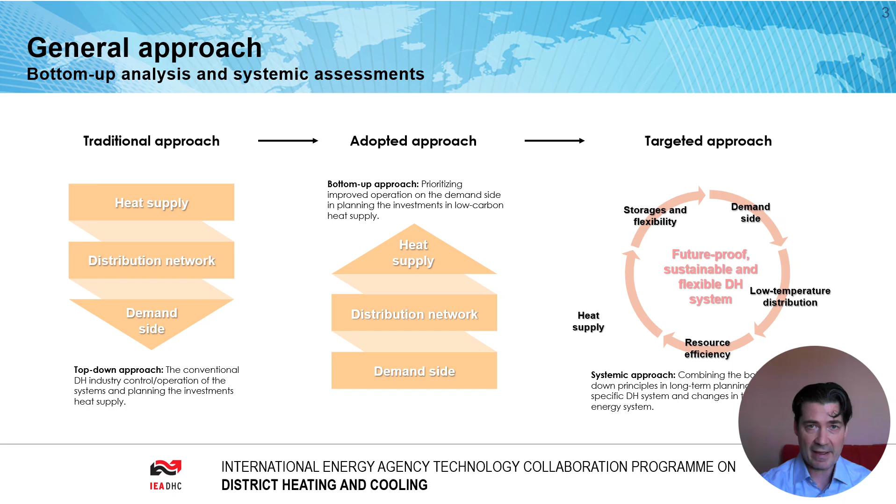So what is flexibility? It is an ability to control the heat supply to accommodate the heat demand. This is useful for managing the demand profile, but also to accommodate, for example, wind and solar power from the electricity system, or to react to seasonal availability of resources. Heating sector can potentially provide significant amount of flexibility in a cost-efficient manner.

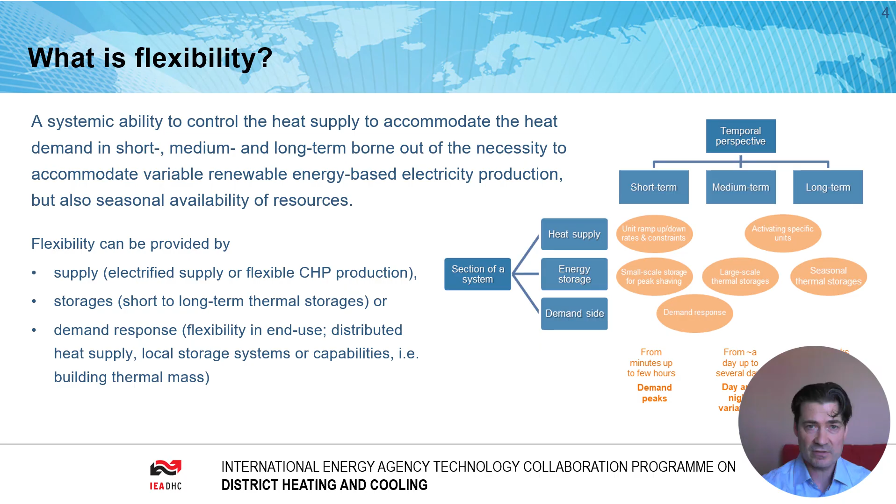Usually, operational flexibility is in focus, but the motivation for increasing the flexibility is more strategic in nature. For example, anticipating changes within the surrounding energy system, preparing for the emergence of excess heat, or considering the availability of renewable heat sources. In the figure there on the right hand side, there is an attempt to categorize the flexibility measures based on where in the system they are provided or from the temporal perspective.

And now moving on to the first WP1, potential of district heating flexibility options in a long-term perspective. The objective of this study was to evaluate policies or measures that affect the flexible use of district heating by using energy system modeling as a method.

This was actually a case study for the island of Gotland, with the focus on the district heating network in the Visby region. Visby has a district heating system with biomass boilers, heat pumps and thermal storages already.

The method was TIMES modeling framework, and the 2 scenarios that were considered were wind power based ones: one with no offshore wind and the second one with large scale offshore wind enabled.

In addition, 4 district heating based sensitivity cases were considered: a base case with no additional measures, one with a capacity tariff, one with a bonus system for low temperature district heating, and then finally the 4th one with both capacity tariff and low temperature bonus enabled.

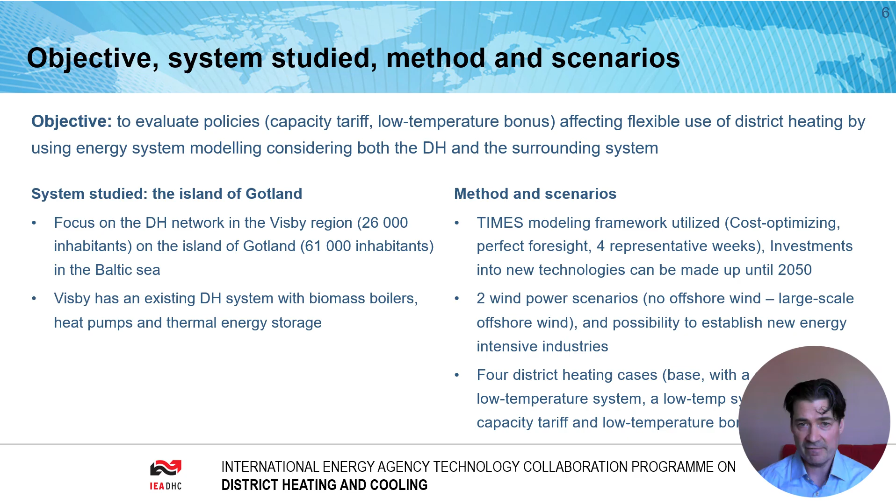So on to the results. Here, district heating production is presented with and without the offshore wind being part of the system. With offshore wind, the district heating is clearly shrinking unless low temperature district heating is introduced. Without offshore wind, the outlook is much more positive. However, when introducing a capacity tariff, this is clearly not beneficial for the development of the district heating system.

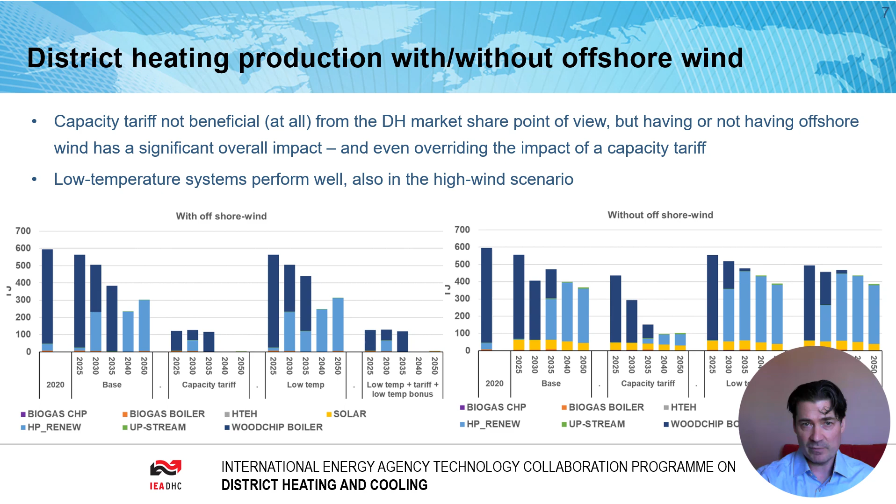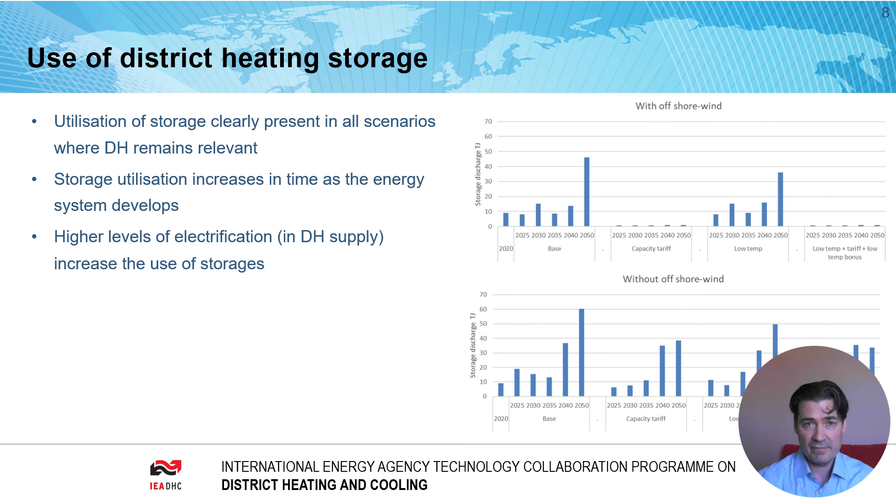Another interesting example of the results is the use of district heating energy storage. The utilization of the storage clearly is present in all the scenarios and cases where district heating remains a relevant option. Also, as the energy system develops and we go forward in time, the storage utilization increases. Additionally, higher levels of electrification by heat pumps and electric boilers, part of the district heating supply, increase the use of storages. So here are some main conclusions about the work.

Surrounding energy system has a profound impact on how the system develops. Capacity tariff as a measure or policy instrument clearly decreases the economic viability of district heating. Introduction of low temperature district heating helps to maintain the market share quite a bit better than the alternatives. And use of storages clearly increases in future district heating systems, especially if electrified heat supply is present.

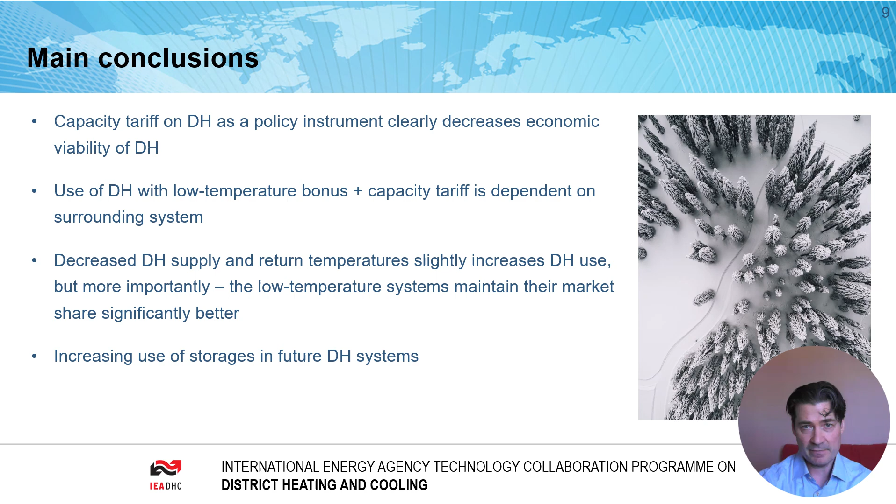So moving on to WP2 and operational flexibility of district heating within the Nordic energy system of 2030s. The overall plan and objective was to consider and assess the impact of flexibility measures, namely demand response and thermal energy storages, in district heating systems on two levels: first, Nordic energy system level, and second, for a specific case district heating system. As part of the work, the impact of different weather years was considered.

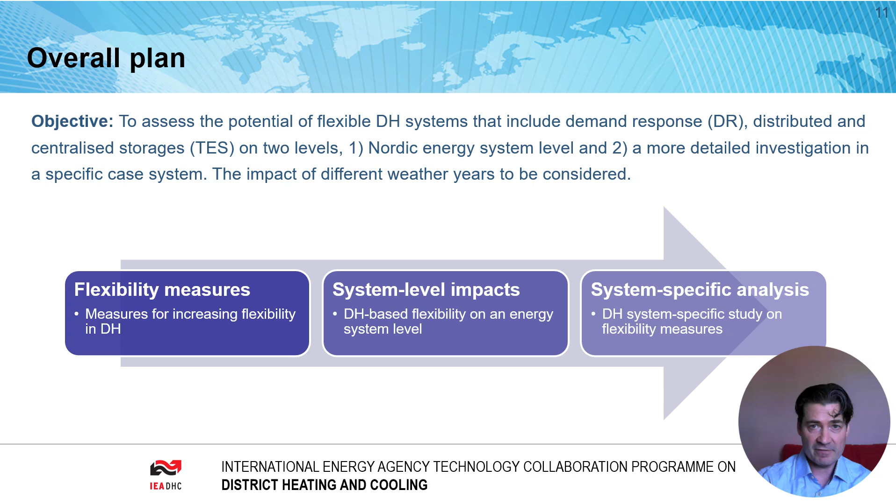3 scenarios are compared: first, a reference scenario; second, a thermal energy storage case with additional thermal energy storage capacity; and thirdly, a demand response case with added demand response capacity.

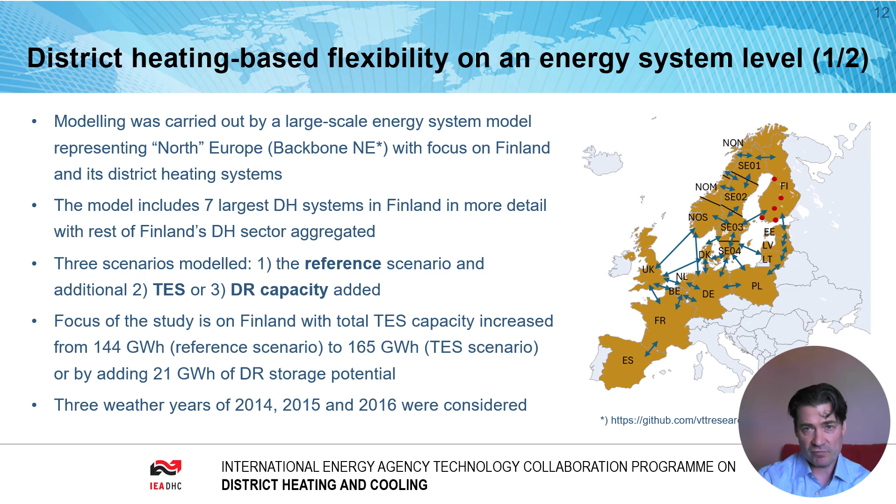To assess the robustness of the results, the model was run for different weather years: 14, 15, and 16. Here are some examples of the results. First, the impact of additional flexibility was positive, although minor. This is due to the comparably small additional capacities defined.

There was also a decrease in biomass consumption in heat-only boilers and a corresponding increase in CHP production, and also an expected increase in electrified heat supply, especially the electric boilers.

Thermal energy storages were used extensively and with high capacity, while demand response was operated with more frequent but smaller adjustments. In the study, we also noted a methodological issue concerning where flexibility is observed, as the system was optimized as a single entity. So would specific parts of the system actually provide the flexibility as modeled? In other words, while the outcome is optimal, can the market mechanisms be assumed to steer the operation of specific systems as indicated by the model?

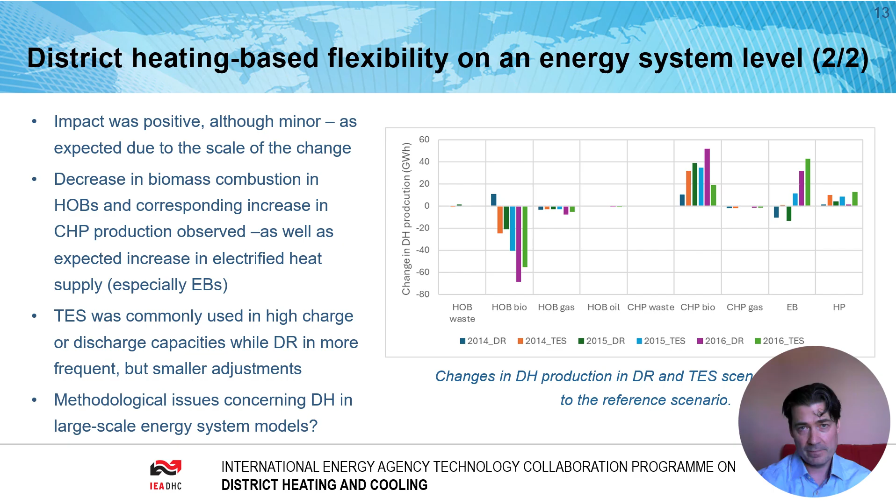Due to the methodological issue, there is clearly a need for a system-specific study. This was carried out using the same energy system modeling method, but for a specific case study system. This case study was done for the district heating system of the city of Kuopio with approximately 1 terawatt-hour of heat demand and a very versatile production mix.

Four scenarios were considered: first, no thermal energy storage or demand response capacity included; second, with thermal energy storage capacity increased; third, with demand response capacity added; and fourth, with both thermal energy storages and demand response.

Electricity and weather years of 2022, 2023, and 2024 were considered. These include the crisis year of 22 and a year with very low electricity prices, 24.

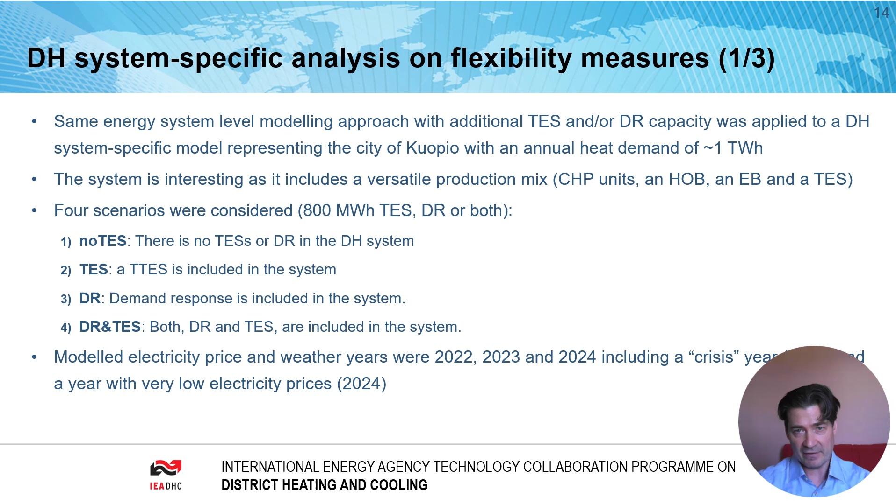Here are some more results. Changes in heat production within the CHP and electric boilers in different scenarios, with thermal energy storage, demand response, or both included, are presented on the right-hand side. Having additional thermal energy storage has the most visible impact, but there are significant differences between years. On the left, utilization of thermal energy storages and demand response in different scenarios is presented, with thermal energy storages again showing the more visible impact.

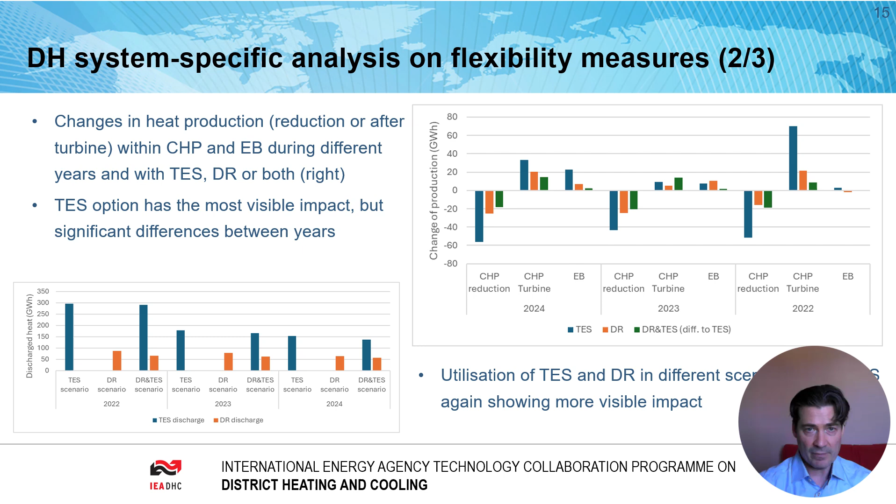Here, annual operational costs to the right and monthly cost savings below in different scenarios are presented. Thermal energy storages provide higher benefits than demand response, but both are beneficial in terms of costs. Absolute values in savings naturally depend highly on electricity price levels, which is a significant factor for the results here. This can be observed by comparing the results corresponding to years and then to the scenarios.

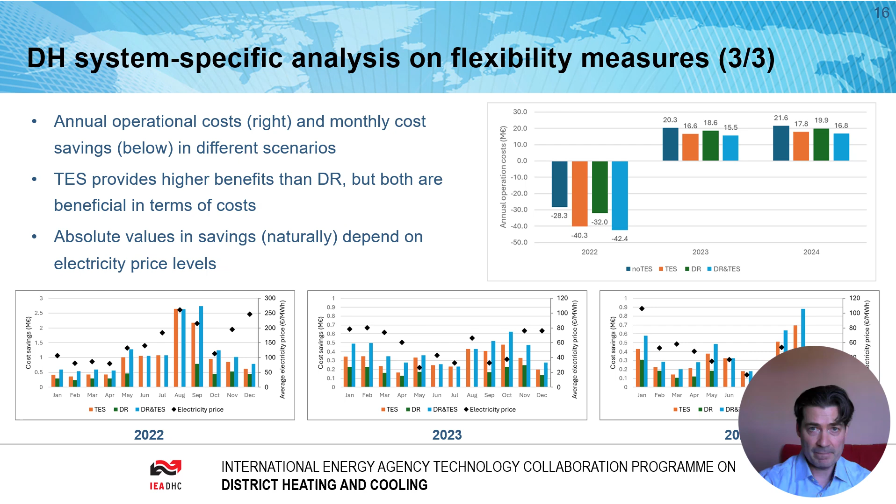Here are some main conclusions that can be drawn from the presented work. Flexibility is becoming an integral feature of district heating systems due to heat supply electrification and also due to the increase of wind and solar-based electricity production in the systems. Linked to this need for flexibility, electrification is clearly a trend in district heating development.

While flexibility provides benefits from both energy system and district heating point of view, the yearly variations can easily outweigh the impacts of having more additional thermal energy storage or demand response capacity, for example, in the systems.

The large-scale energy system modeling shows that there is a benefit to be gained through flexibility, but it also shows some signs of unrealistic behavior. Will specific systems actually provide the flexibility as modeled? Also, one additional point is that reserve market participation, which was not considered in this study, is likely to represent opportunities for systems that have increased flexibility.

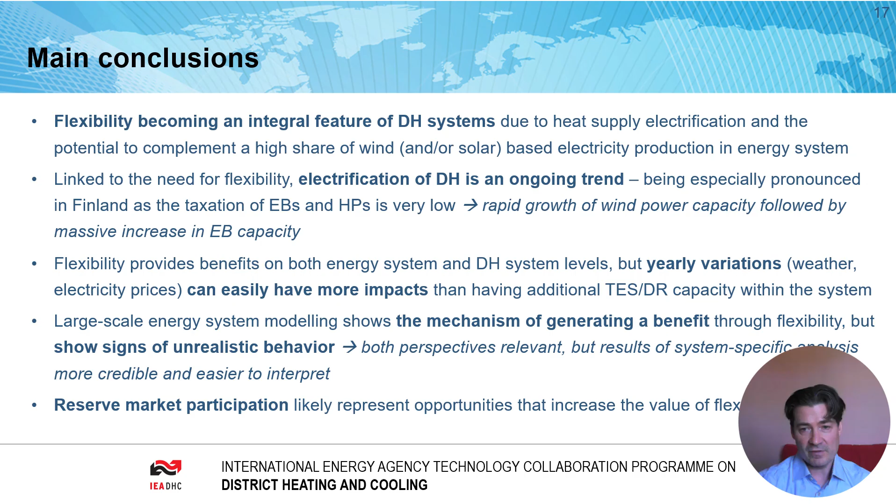Next, moving on to WP3 and future-proof design and operation of demand-side components. A realistic case example of the city of Viborg and its district heating system is used for this study. The Viborg district heating system was originally based on natural gas, but aims to be fossil-free by 2027. This target's economic feasibility is compromised by the bottleneck of having high supply temperatures in buildings.

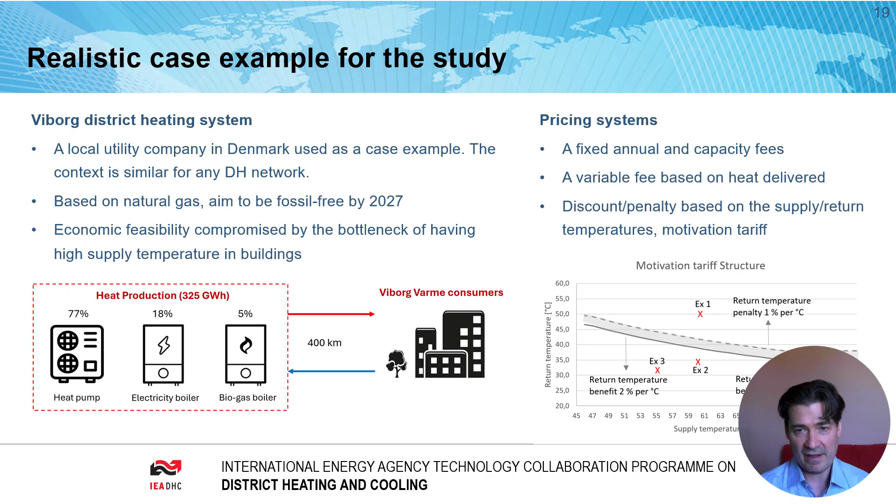This is mainly due to the future heat supply being mostly dependent on heat pumps. Viborg also has an advanced pricing system, for example a discount and penalty for the heat tariff based on the supply and return temperatures, so-called motivational tariff.

The first part of the work presented focuses on space heating systems in existing multi-apartment buildings with radiators as the heating elements. The plan and method was to utilize heat cost allocator and heat demand data to analyze the operation of a heat distribution system and to suggest improvements.

The outcome was that significantly lower temperature levels were possible without any compromise in the heating service itself. As part of the work, a methodology for securing low temperature operation of buildings was developed.

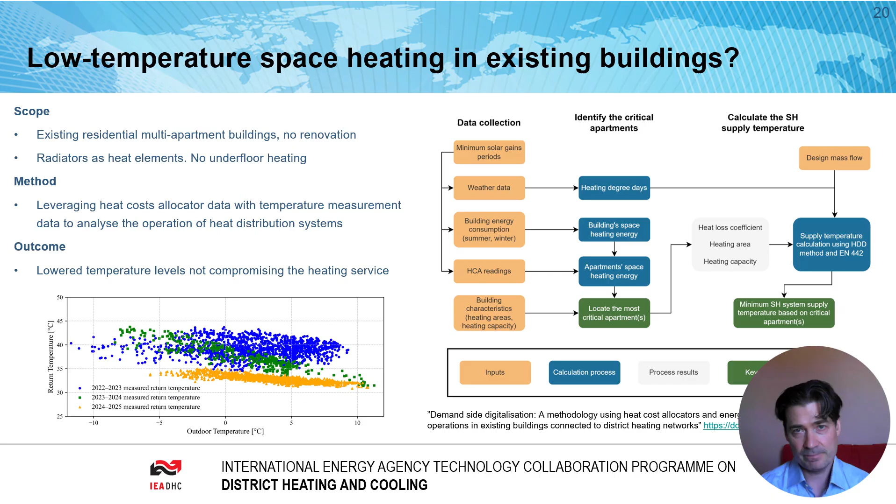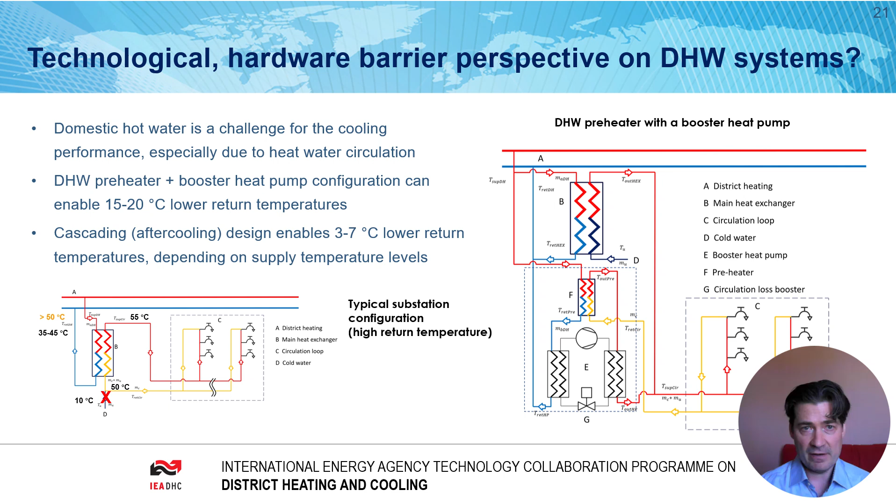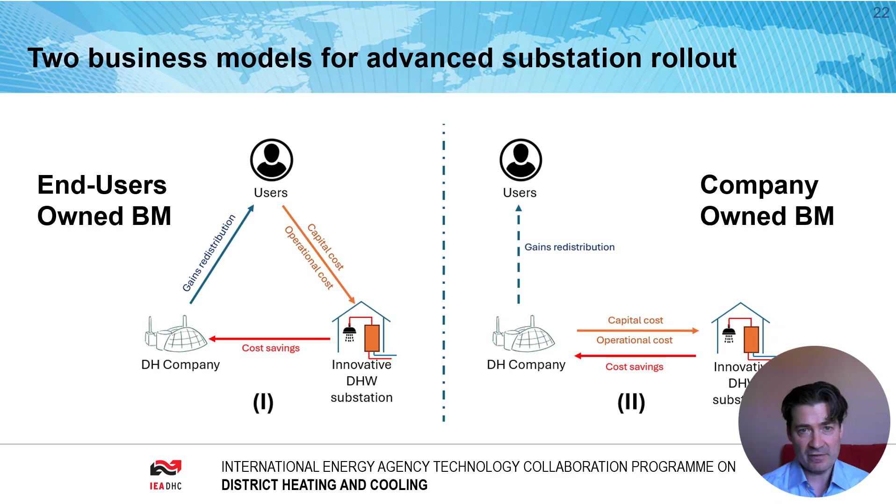Related to implementing the rollout of advanced substations, two business models were compared and studied. In the first alternative, the substation is owned and the investment is made by the end user. In the second, the substation is owned by the district heating company, which also makes the investment. In the end user option, capital costs are offset through pricing provided by the district heating company, while in the second, capital costs are paid back through the direct economic impact of improved efficiency due to low temperature operation.

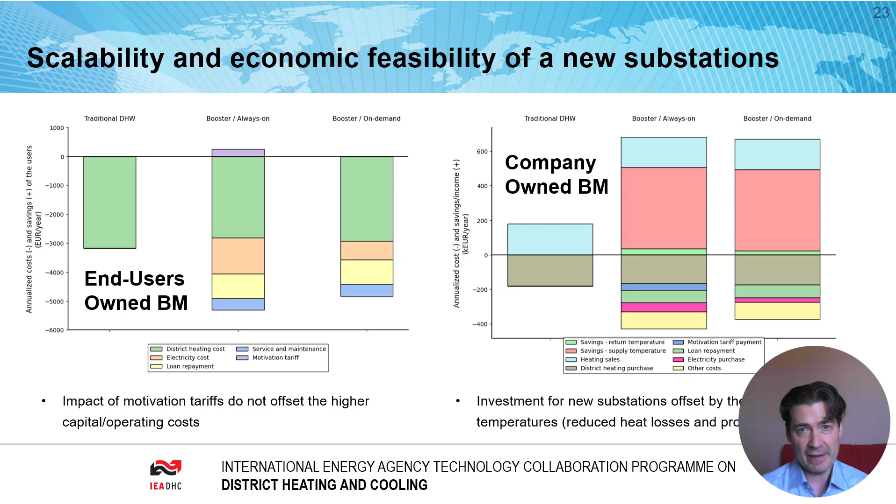This slide shows a comparison between the business models and their feasibility in rolling out advanced substation designs. The results show that pricing alone cannot offset capital costs from the end user perspective, while investments made by the district heating company represent the feasible arrangement. This is a result for a specific system, but represents a highly interesting perspective for any district heating company aiming to reduce distribution temperature levels.

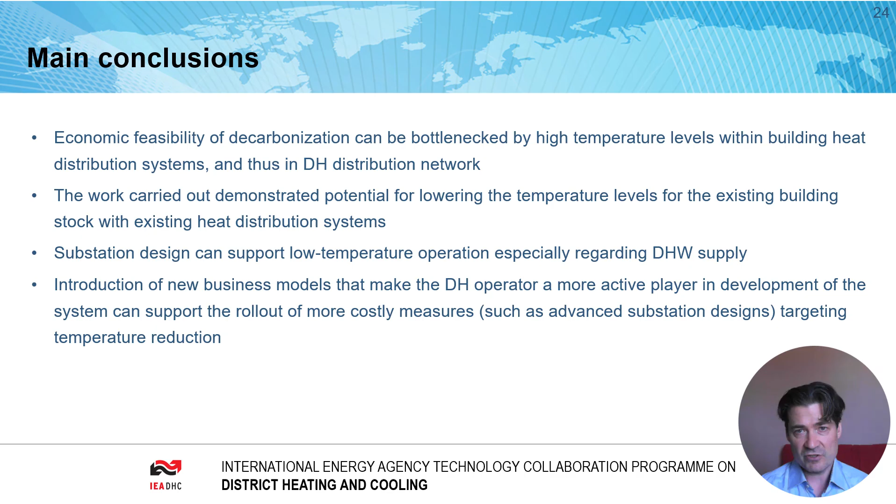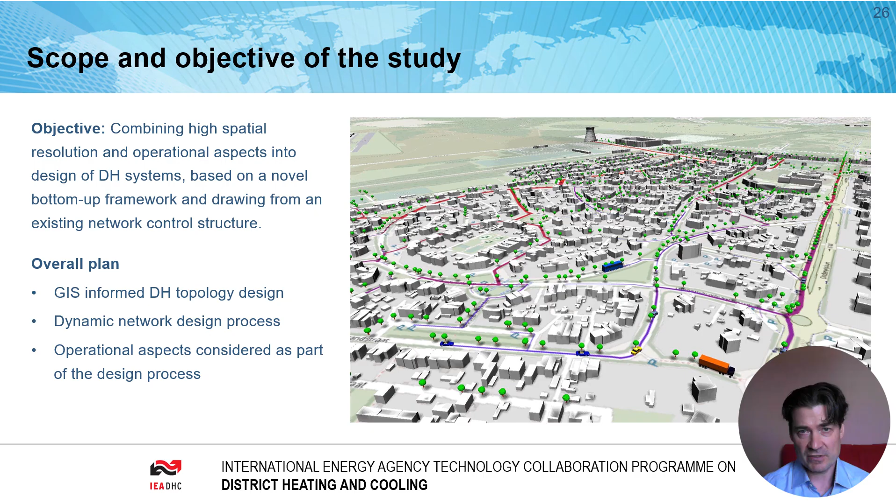And now WP4, flexibility from network design, including operational aspects. In this part of the study, topology design is considered from a perspective of combining spatial and operational aspects. Network structure and dimensions are optimized considering both investment and operational costs, also taking into account demand-side management opportunities.

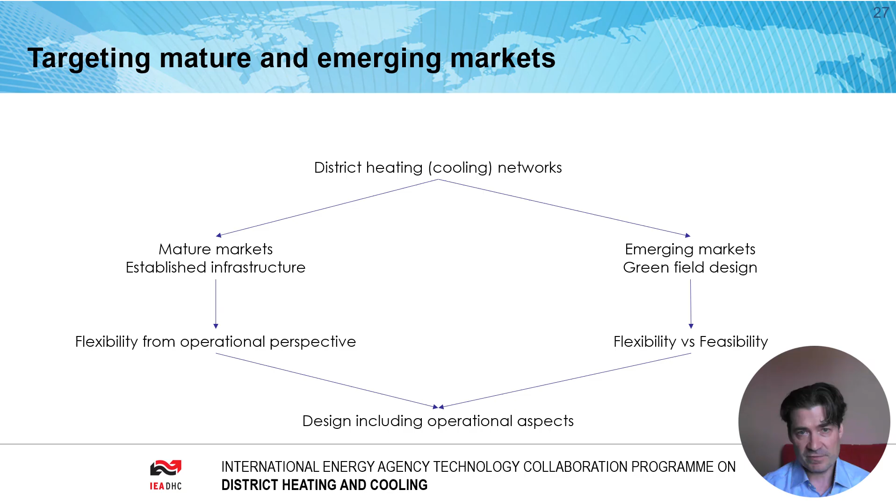In this work, these two aspects are combined to produce an even more feasible design for a new system, with operational perspective considered as well. This work is based on two existing tools, Storm and BathOpt. Storm District Energy Controller focuses on operational optimization, while BathOpt provides a network topology optimization service.

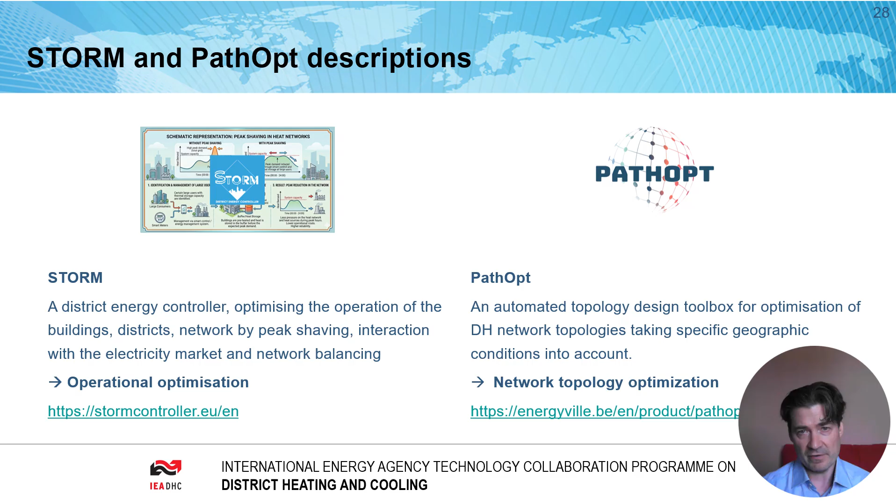The two approaches were combined and demonstrated in an imaginary case example set in the city of Menen in Belgium. In the picture here, the potential routes for district heating pipelines are presented, as well as the locations for consumers to be connected.

Three scenarios were considered: a business as usual scenario as a comparison point, a scenario with minus 20% peak shaving for all consumers, and finally minus 30% peak shaving for the 5 largest consumers in the system.

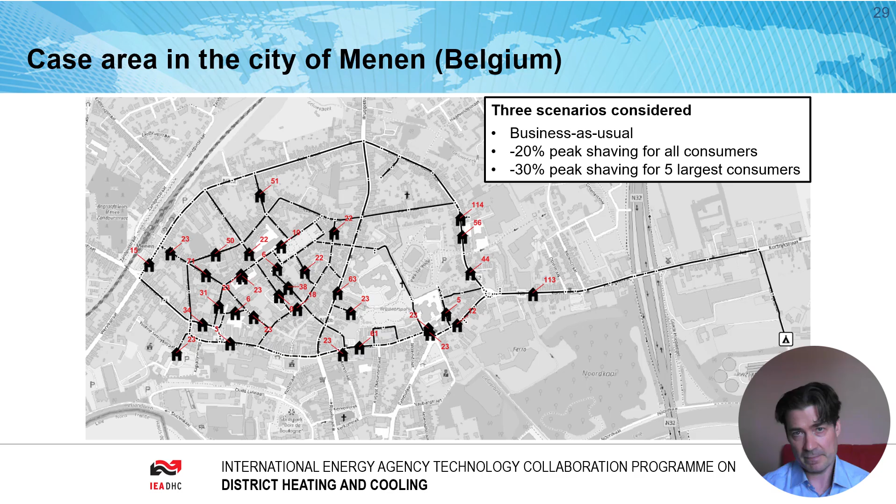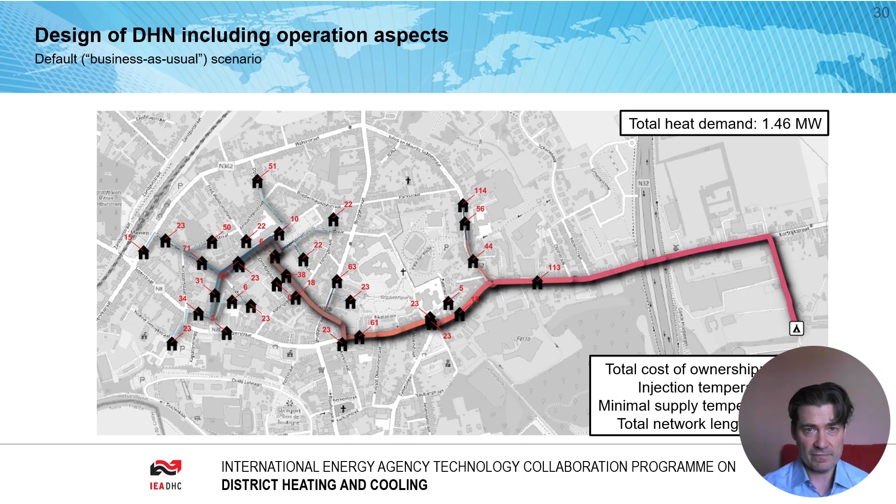This slide represents the business as usual arrangement, resulting in a total heat demand of 1.46 megawatts and a total cost of ownership of 8.7 million euros.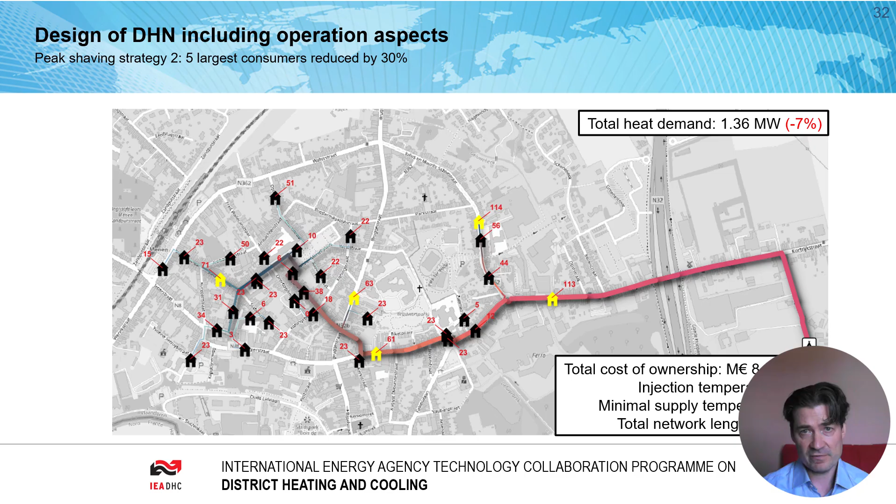The scenario with minus 30% peak shaving for the top 5 consumers shows similarly smaller pipe dimensions and a reduction of minus 7% in peak heat demand and minus 5% in total cost of ownership.

And here are some main conclusions about this work. It was demonstrated that including operational aspects into the design stage can affect network feasibility and result in different topologies and dimensioning of the network.

The total cost of ownership, due to the introduction of peak shaving measures while utilizing the developed approach, shows clear savings due to the modified network design. The details do matter; for example, the non-linearity of the problem has an impact on the balance between CapEx and OpEx of the studied cases.

Ultimately, the work here presents a different approach to flexibility. Automated design can increase district heating network feasibility and increase the integration of renewable energy and waste heat sources.

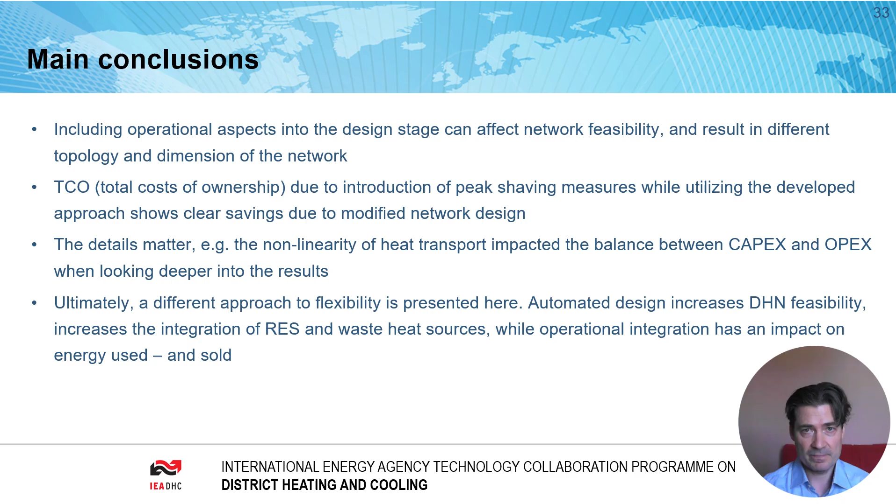And finally, here are some conclusions on the project overall. Four main learnings can be drawn from the project. First of all, building level actions are in a key role.

A bottom-up approach utilized in this project could enable more efficient development pathways for district heating systems, aiding the introduction of especially low temperature distribution.

Flexibility is becoming a systemic feature of district heating coupled with the energy system, and its significance will only increase as wind and solar-based electricity production capacity grows and the trend of electrification progresses.

However, it has to be said that the solutions are strongly context-specific. The operational environment in terms of regulation, energy markets, competition, technological developments, and climate is always to be considered.

Lastly, anticipating future development is crucial. As the operational environment changes fast, interconnections between the electricity and heating sectors, for example, become stronger. One should not focus only on the district heating system in hand, but also consider the developments surrounding it.